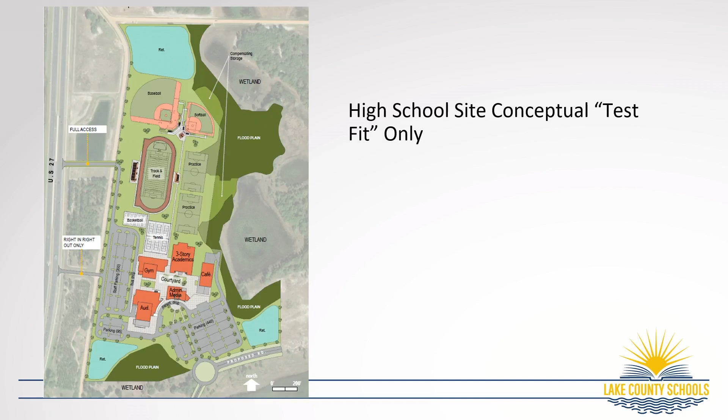As far as access, when we're this early in the development process, it's always a question. There is legal access from US 27, and North Bradshaw Road, although right now that's a dirt road. The seller is to construct the south access road, that loop running between Wellness Way and South Hancock. We would be, per the contract, responsible if the county or city requires a traffic control device at the entrance to the school, so if that's a roundabout or a signal, when we actually go through to build this school, we would be responsible for it.

Then the utility connections — the seller is to extend the utilities to the site. One thing we were concerned about is timing, say something happens and it takes a while to develop this whole area. There's a provision for what they call self-help, basically a pioneer agreement that the district could use to pioneer those utilities. I don't anticipate having to use that, but I think it's a good idea to have that ability in the contract if we have to. It would then be reimbursed by the other developers as they came in. The contract also anticipates a post-closing agreement to memorialize all of those details, and James and I would be working with the developer through that before closing.

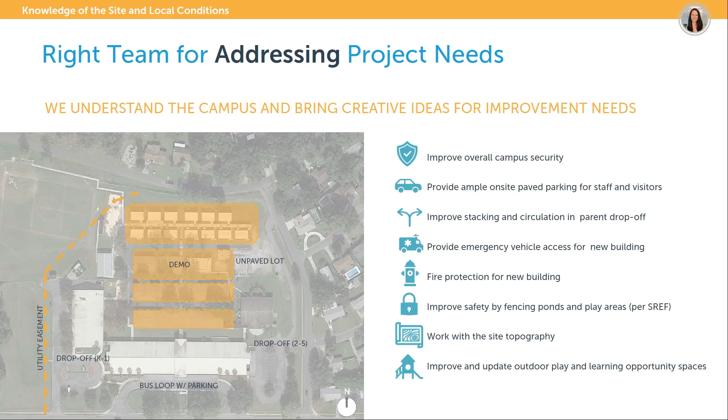The last one I'm going to talk about is fire protection. Your campus currently has buildings that don't have sprinkler systems, and you also don't have an on-site fire water loop with fire hydrants to service the buildings from the exterior. So that's something our team would want to look at, in addition to providing vehicular access for emergency vehicles.

Additionally, our team includes Matthew Flores, who is a former art teacher with OCPS at a Title I school. My sister is a principal at an OCPS K-8 school. Education is important to us not only because we're architects who want to design incredible 21st century learning environments, but because it's part of our DNA. It's part of who we are. It's part of what we give back to the community.

This is why, with this particular set of kids and these demographics, we need to give them all the opportunities to succeed. Research has shown that if you invest in their education and in facilities where they're able to learn and grow, they will want to come back to school, and they will cherish the moments they have there. So the demographics prove that, and with our help, we think we can make this school a hallmark for success in the future.

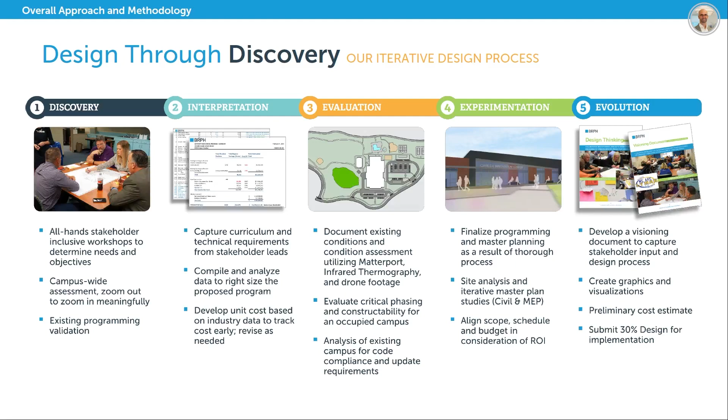Then we'll take that and work collaboratively within our own group, interpreting, evaluating, and experimenting with that data, and ultimately create a visioning document that synthesizes all of that stakeholder information along with our creative process into a compiled document for your review. But let's take a look at what that discovery process looks like.

Our initial phase will include design thinking sessions where we work with your stakeholders through the lens of 6 different education-specific design drivers: safety and security, technology, wellness and sustainability, flexibility and adaptability, teaching methods—such as what specifically you're trying to accomplish with the art program at this campus—and finally the human experience, where we focus on the individual, the group, and the community at large.

But we don't just take this evidence-based design approach to our projects. We weave something through all of this that is unique, creative, artistic, and we create a design story, a design narrative. We look for opportunities, for hidden gems in the project that we can pull out and create this beacon, as my colleague Francisco said, within the community.

And we see a great opportunity to build a story around flamingos. We've already been doing our research on flamingos, and they are unique and fascinating to watch. They're very social creatures. We want to create an opportunity, a new habitat for students similar to a habitat that flamingos live in. We took a deeper dive and identified that there are 6 different types of flamingos, including pink, white, red, and orange. They are identified by their voice, by their parents when they're young. And the parents, the mother and the father, both take a collaborative approach to building the nest for their egg.

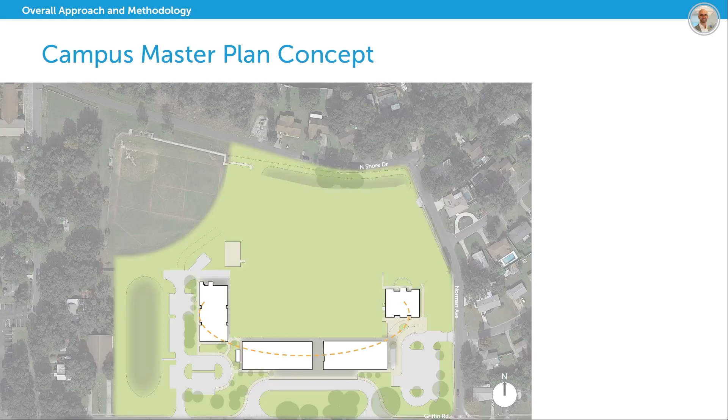So what happens when we demo the old buildings off of the campus? We see this new organization start to happen. We see a ring of buildings, and we see an opportunity to complete that ring and ultimately create a campus that is built around a campus quad.

This is one concept. We can develop several others, but this is an initial concept where we have buildings 1, 2, and 3 existing. Building 4 is a brand new 2-story classroom building. Number 5, you have the campus quad in the center. We've included additional parking to address the needs mentioned earlier, and an extended drop-off canopy.

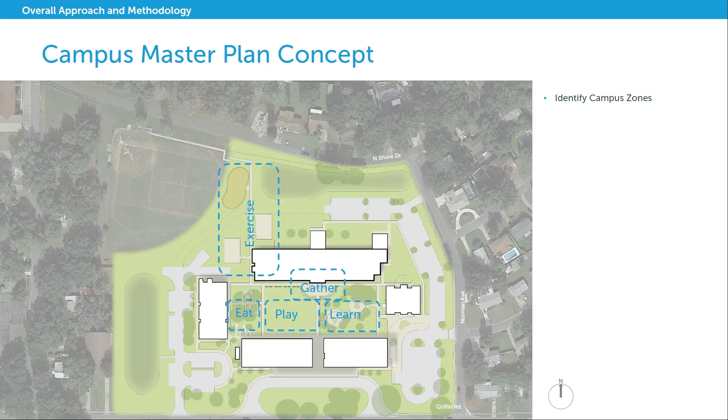I'm not going to read all of these, but you can see that basically this brand new campus goes around this center courtyard concept, and you can see the zones created through the organization of this new campus.

These are some of the highlighted opportunities we see, from shaded picnic to gardening, open field play, outdoor amphitheater so you can accommodate school-wide events, shaded learning pods, shaded entry and covered paths along the way.

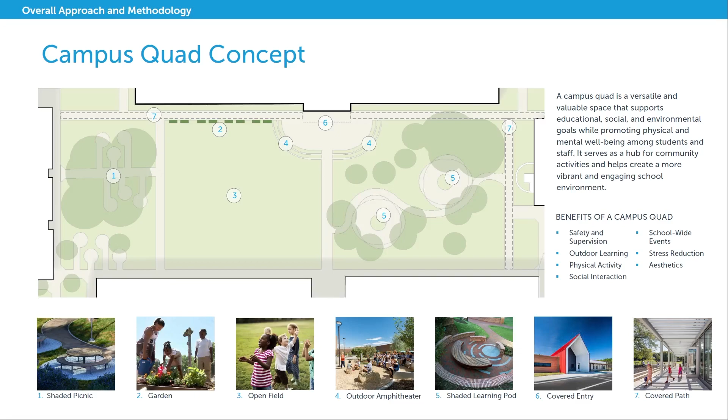We've basically replaced all of the existing program with 38 classrooms for now. We can identify and narrow down this scope later, but all of this is centralized around a center learning area that can be utilized for extended learning.

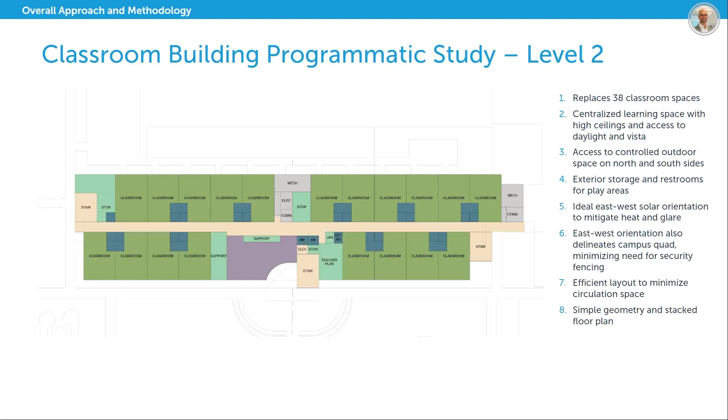And we have fenced-in areas on the north and south side for the students as well. The second floor is designed in an efficient manner so that we can stack program, and there are a lot of efficiencies we can gain through that type of organization.

We'll go through an iterative process where we play with form. We continue what we've already started in terms of the experience for the students.

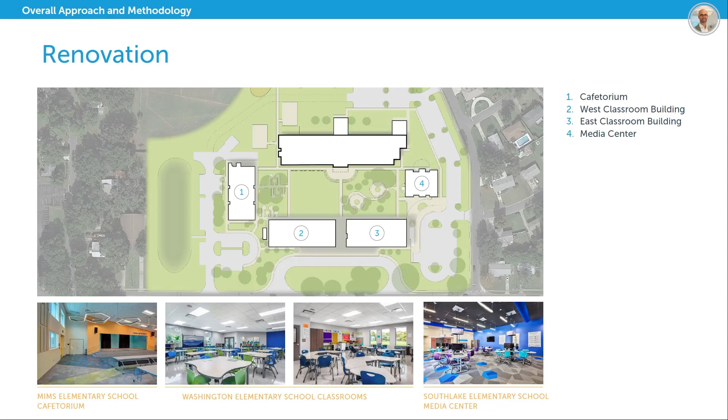And finally, we don't want to leave behind the existing buildings. We see opportunity to renovate the cafetorium, existing classroom and administration building, and of course the media center, which needs a good bit of attention. And with that said, I'll pass it on to Leah.

From an MEP perspective, we do want to do a new central energy plant for the new 2-story classroom building and also tie in the existing media center after the demolition. That's the last DX building, so we'll tie it in from an energy efficiency standpoint.

We would also provide chill water to valve boxes outside of the cafetorium and admin classroom. We understand the RFP had in there to do renovations for mechanical, but we also understand that might be a budgeting concern, so we'll at least size the CEP for future growth and be able to tie those buildings in the future. And as we work through the budget, if we can afford to do it, we will do it and tie those buildings in.

We also want to do LED lighting and technology upgrades campus-wide so that there's equity across the campus. We do have lead time problems still, so we will have to do an early equipment package from a scheduling standpoint. And for a little background on our knowledge of this campus, we did do the consulting report in 2021, and we've also developed the new design guidelines, so we're very familiar with the district standards.

So we're looking at a construction schedule. Here's our schedule - we're looking at a construction schedule of 18 months. But to back it up, if we start with the NTP in December and go through programming, schematic design, and so on, our goal would be at the end of design development, as Leah said, to do that optional procurement package for electrical and mechanical gear, so that by the time we finish construction documents in September, you would have had enough time to start procuring that equipment, so that in January you'll be kicking off construction and you'll be ahead of the game right there.

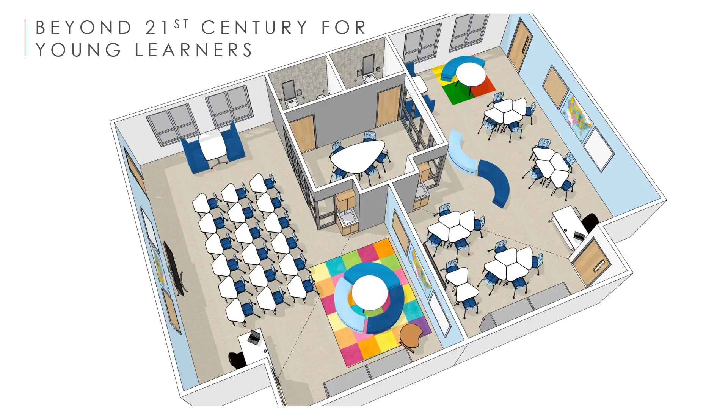Furniture - knowing the size, the little feet and footsteps that happen at an elementary level, particularly at the primary level, it's important to know distances between buildings and the furniture selections that go into the spaces we have. We want to talk throughout the design process about the adjacencies of classrooms, access for the restrooms, and some of those in-between spaces that may support these various teaching and learning styles.

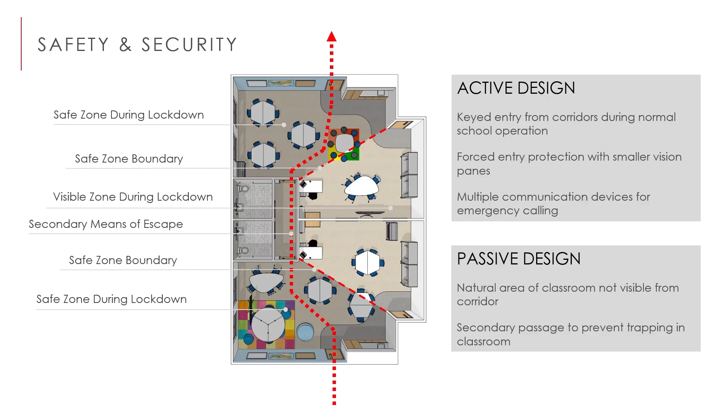Safety and security is top of mind for all of us. We need to approach it not only from the single point of entry on a campus, but the way students move in and out, and everyone in the school. We have a couple of examples here graphically showing the classrooms, the safe zones, passive observation areas - everything from the physical layout of space to access control and everything that supports the teachers and the students.

A lot of the way we work is in real time in 3 dimensions - designing on the fly, which helps facilitate conversations about spatial adjacencies. It's a dynamic design process where we use visualization and virtual reality to look at these - 2 different spaces that are virtually the same, but through material selection can have a huge impact, and furniture selection can have a huge impact as well.

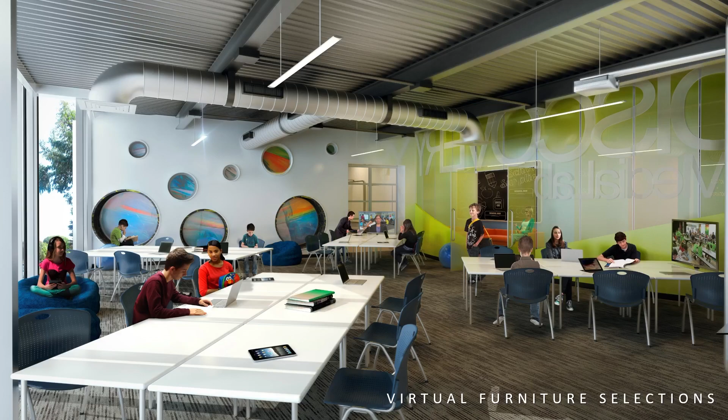So from day one, after we understand your needs thoroughly, we'd be able to design in 3D and share those, and really make decisions as a group. That's what we need to do, is pull out all the best ideas from the entire design process to support your vision for the modernization of Beverly Shores.

An example right here, this is the replacement of Gerald Adams Elementary down in Stock Island, just outside Key West. Some smart planning went into this. At every grade level, they have a pull-out or collaborative space. How we designed it was we put 3 walls on it, on the exterior wall, but if they needed to capture it as a classroom in the future, they could add a 4th wall versus bringing a portable on site.

But they love the spaces they use, and we went back a year and 2 years later and found out that they use these spaces effectively.

The history of Beverly Shores Elementary is important, and this is an amazing point in the history of the school. Thinking about the future, we want to document that where appropriate. It could be simple graphics in the reception area, or it could be a room dedicated to the history of the school that we can put on display.

Cost control and value design. We know the budget, $21.5 million. We know all the issues. We've been through this multiple times, obviously.

Focusing on those last 2 issues, working closely with the CM and cost estimator. We know costs are rising, and we know lead times on some critical pieces are important, and it's been taking a little longer to get some of those pieces. So working with the CM and our historic cost database of recently bid projects, we'll be able to keep the project on budget and on schedule.

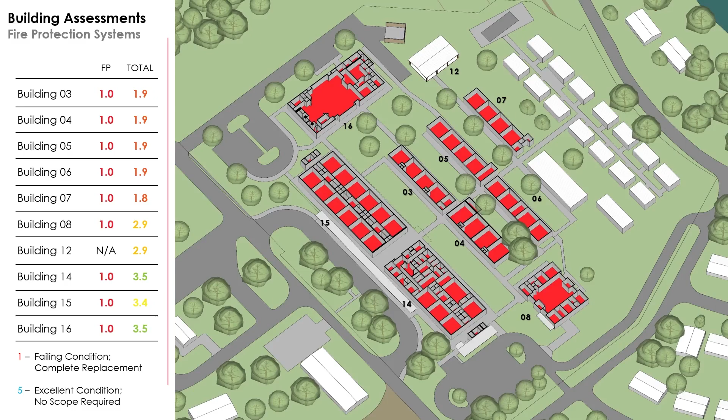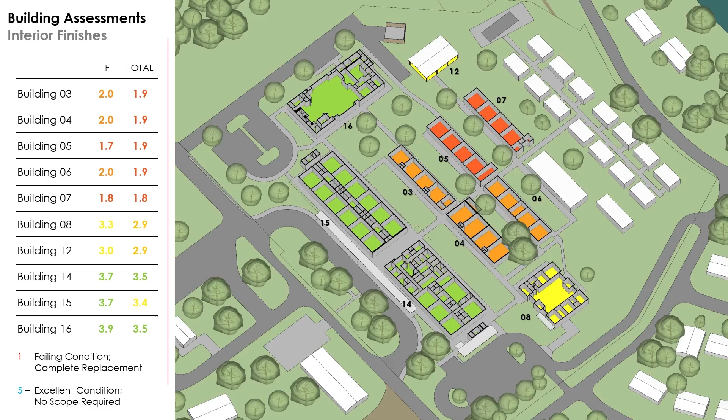Where we have some room for movement is in our interior finishes. Now, when we walk the school, it's in great shape for the age of the facility, but there might be things like, for example, VCT. That's a maintenance expense that the school principals take care of every year. By switching to LVT, which might have a little bit of a cost, that's something that we would eliminate. No need for waxing.

So we have a great handle on what the new construction costs, based on our database throughout the state. And so this exercise allows us to prioritize the priorities and the must-haves, and then also set a value to the wants.

Yeah, so Leesburg Library was actually my first project out of school as an intern with Harvard Jolly.

So we know the area quite well, and how does that translate to Beverly Shores? One of the things we took into account is how rapidly the education experience is changing there. I think Principal Christides has done a great job of improving the standards—I like her quote, our students deserve a quality education, and we're here to make that happen. I think that's something we can help with in the renovation of the campus.

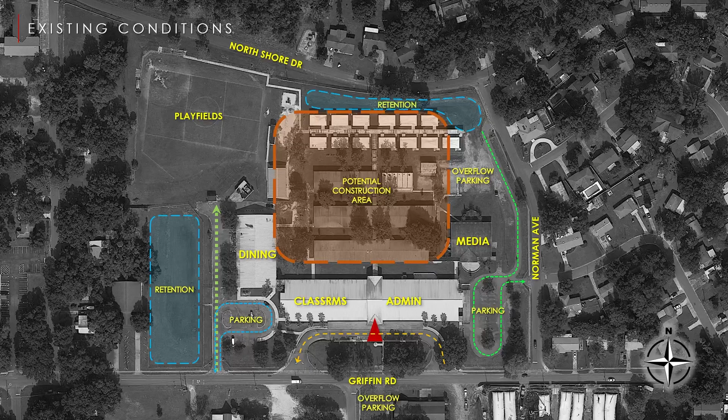We also observed the car lines and everything, and there's really a controlled chaos out there, which is pretty carefully put together. We were impressed with the detail on some of those things we saw around the site, and that's the type of detail we want to continue through as we potentially work with you on this project.

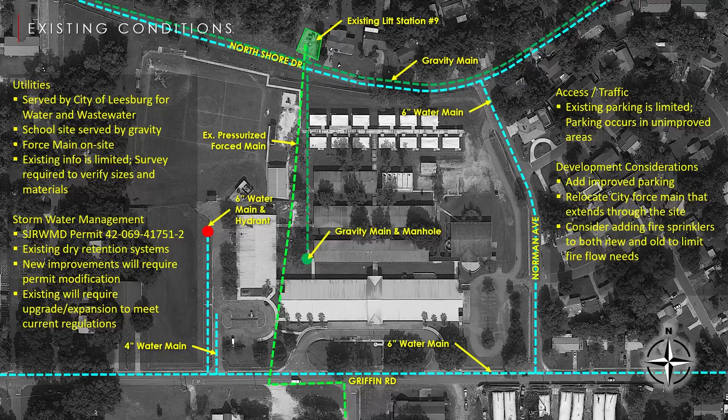One thing to note here from a site perspective: there's a force main running through the site, and to save some costs on the project, we are going to avoid that in our building footprint, so that money can be reallocated to educational spaces.

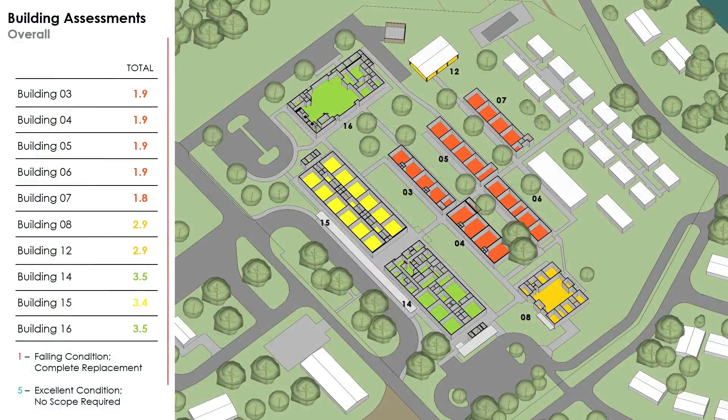So how does that translate to the revolution of the campus? Like I said, this is kind of what the existing condition of the campus is. And if we use the money right, we can start to transform some of the spaces.

So that money allocated to the media center could give us a look that modernizes it. We can reimagine the dining spaces. Right now the admin is in pretty good shape, but it doesn't have a traditional single point of entry in the sense that we currently do, so that's something we would need to address.

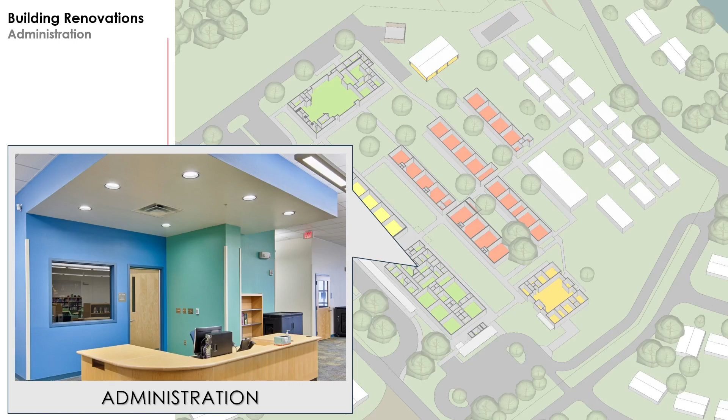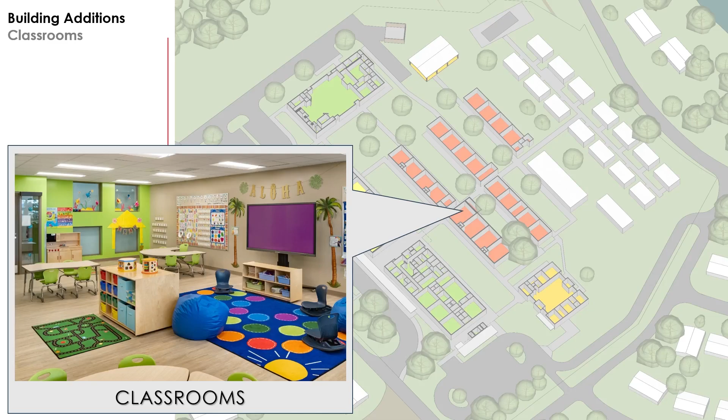And then finally, the bulk of this project is going to be the addition of classroom spaces, and this is where we can really start to put some effort into revolutionizing the campus.

So we're going to present two schemes for you. This first scheme is primarily looking at just adding classroom spaces—we're going to satisfy the need of providing a two-story classroom building. But this is going to help allocate the money to the other parts for the renovation piece. Again, in this scheme, we try to incorporate with what's working well.

So we have extended the parent drop-off to the north, and enhanced parts of the campus that we believe in, and also created a courtyard atmosphere. This is something we've seen as being very successful for these types of open campuses, where you have a secure perimeter, and the buildings form a perimeter, and then in between you can have lots of activity.

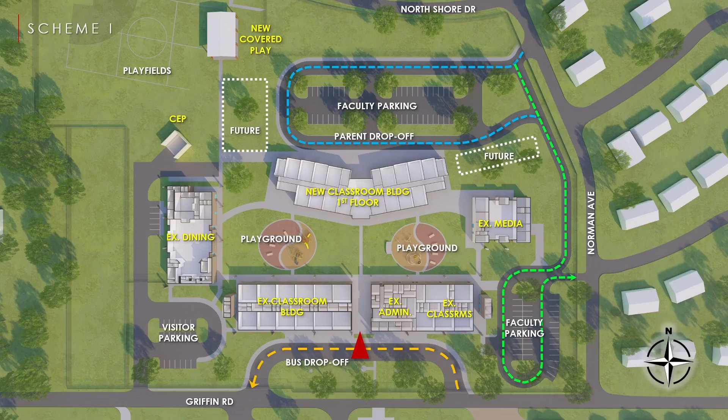And then with the new building, we can start to add collaboration spaces and activate some of the spaces that are not currently in the campus today. Again, we are proposing a two-story building, and we know the existing context is residential, but the way the building is positioned—in the middle of the site—the scale of the building is kind of hidden from the context of the surrounding community.

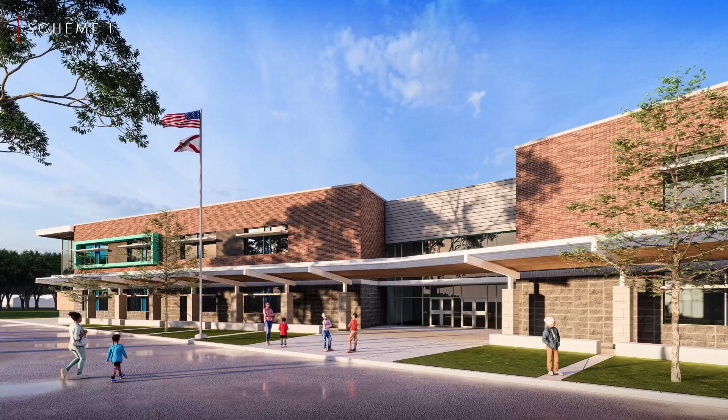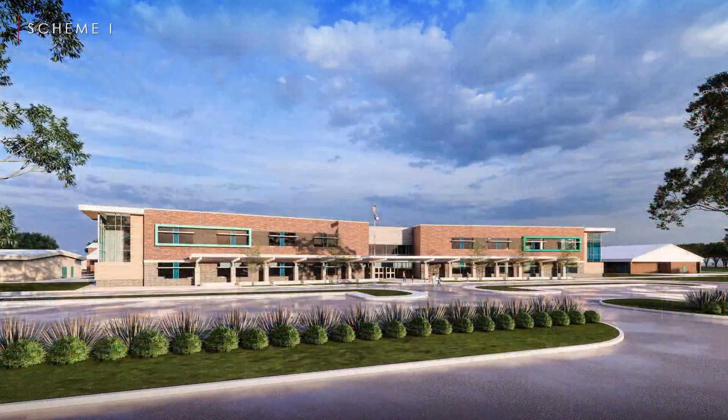So again, through the design process, we want to illustrate what this new two-story building could be. We bring this up live, and it really facilitates a conversation right there on the spot to look at scale, materiality, and what the impact of this new building is going to be on site. Here's another view, backed up a little bit, south-facing, north-facing in this view.

Beverly Shores has been around for 60 years, and we believe with this renovation, we can extend that timeline another 60 years. So we want to do something with this second scheme that really transforms the campus and the image of the campus.

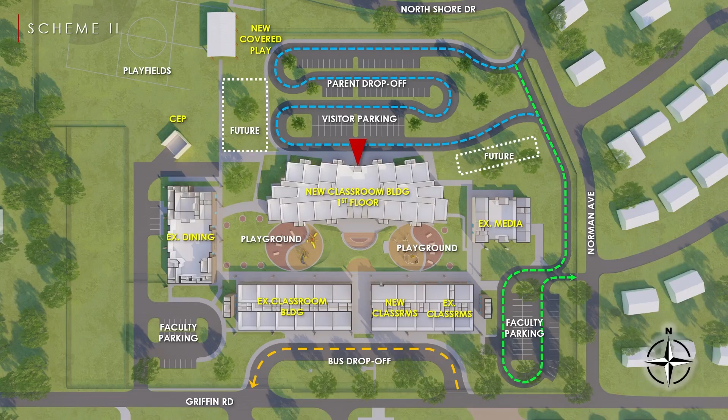The issues with not having a Sally port would now be eliminated. Now we have a single point of entry, creating a new front to the campus. We've extended the parent drop-off, made the queuing line longer, and addressed the faculty and visitor parking. There's no longer a need for overflow parking, and again we're maintaining that central courtyard.

We could really emphasize the single point of entry, which isn't current in the scheme as you see it. Although it's a two-story building, the scale is massaged by the adjacent existing buildings that remain, again creating that new front.

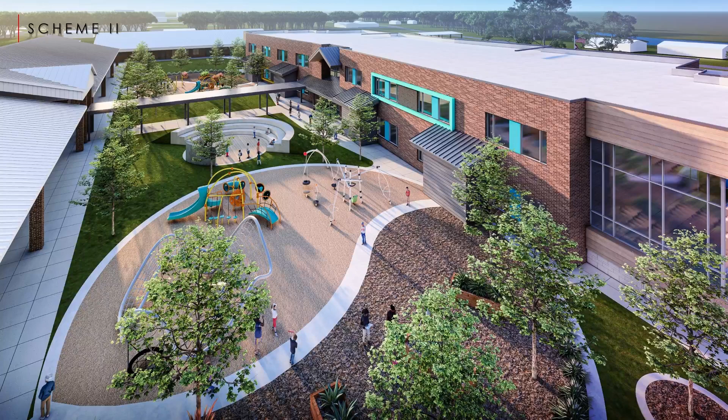The Principal mentioned the Performing Arts program - maybe there's a kind of space in there that can support that specifically. Really it's a blank canvas for that secured courtyard area that can accommodate a lot of the outdoor learning that many schools are embracing or want to embrace in the future.

These are some of the views, showing how we incorporate the trike track, or how the K2 playground is separated out while providing close access to the classroom building, which is typically pretty important. These are all variables, illustrated here in 3D.

I think a picture's worth 1,000 words. Typically these facilitate great conversations about how we manage your dollars and your budget based on the priorities of the project overall. So here's another view.

We just had some fun with this - architecturally it could end up in really any style, we want to blend in. One thing we know about this proposed two-story building is it's in the middle of the campus, not at the edge, so you won't overwhelm the residential neighborhood. We want to think about things like that.

In closing, we are here to support the vision of the school and the vision of the district, to see your vision and mission through. We don't currently work with you right now, and we're eager to prove ourselves. This is your team - the team that will be working with you day to day. We're here from start to finish, and we're committed. This is a priority project to our firm - Beverly Shores Elementary, the replacement. We love these types of transformational projects. Beverly Shores and the community is going to be transformed for the next 60 years.

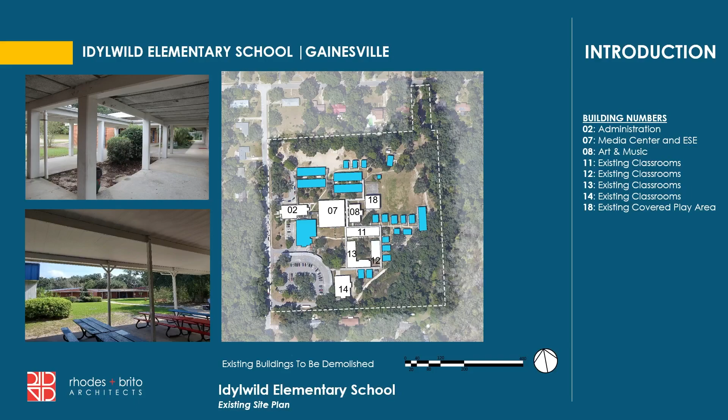Similar to the project at Beverly Shores, we had old buildings. A lot of the blue buildings were old buildings built in the 1960s, and also portables, a lot of this was because they needed permanent student spaces. The other thing was they had no organization in this campus. So what we did is we came about and created a plan. We built new classroom buildings, cafeteria, but also everything was built around a centralized courtyard.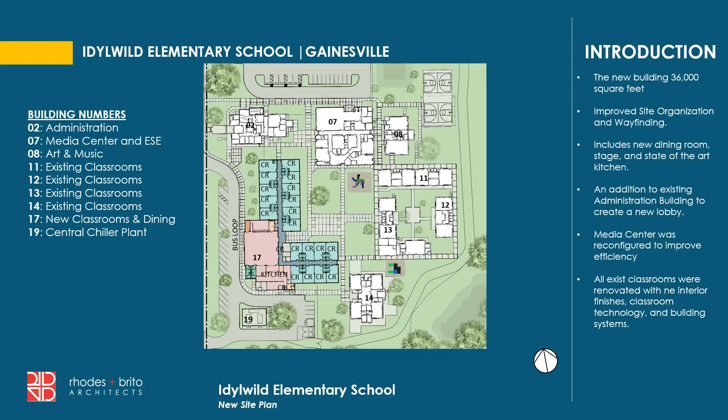And now wayfinding and people walking to this campus is totally transformed. And this is what we try to do in our goals, we try to take and improve a project. When they built buildings back then or added onto campuses, they just stuck it in the green field, they didn't think about circulation. So these are the things we're trying to bring back. And here's some imagery in front of our cafeteria and bus drop-off area, and also some of the classrooms that we did. So it was a very successful project.

So you're interviewing 5 firms today. I know all these firms, some of them are my friends, so I would love more than to beat some of my friends and win this project for you, for us.

But one of the most important skills an architect needs for this project's success is the skill to listen. This is why we received this compliment from one of our last clients, that we're excellent at listening to the needs of stakeholders and owners. It's one of the highest compliments we can get, because that's really what starts the ball rolling, and it's having good listening skills. So that's what we do best. Here's a list of some things that we carefully do, to pay careful attention to how we can make this project a success. However, the biggest thing is listening to you, the community, and the principal in terms of what they want. And so that's how we've been successful on that.

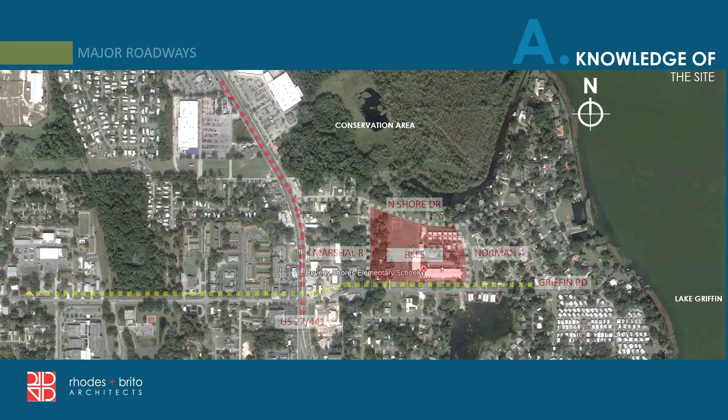So Byron, go ahead and talk about that. Thank you. Yes, well, you've asked us to talk about the knowledge of the site. And if you can see our school, it's located there, and you can see the major roadways that serve and get us to and from the school campus. One of the things looking at the existing site, we know it's about 15 acres. We have about 450 permanent student stations and 16 existing portables.

So one of the things that we've talked about is the parking is undersized. You're also utilizing now off-site parking. Also, the queuing has been an issue, and you have 2 queuing lines now. So those are the things that we're going to look into.

In terms of permitting and utilities, stormwater, St. Johns River Water Management is covering the stormwater. And we feel the infrastructure there is adequate, however it will be modified when we start constructing new buildings. So our purpose is to reuse these. Also, you have fire hydrants, fire mains, all of these things would be beneficial because we'll probably sprinkle our new building, and that would be very beneficial. In terms of permitting, there's courtesy reviews to the city, but mainly the school board is what controls a lot of our building permitting.

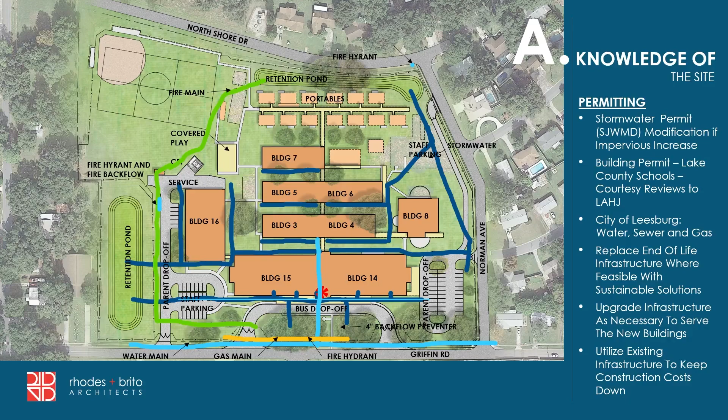All right, so we're going to study the demographics of Beverly Shores Elementary School. As you see here in the aerial, the school is located on this aerial in red. This is located in the city of Leesburg, northwest section. It's in School District 2. Right now, we've sort of summarized that it's about 660 current enrollment, maybe plus or minus. And there's 5 ESE classrooms, and we need to consider those classrooms as we do some planning.

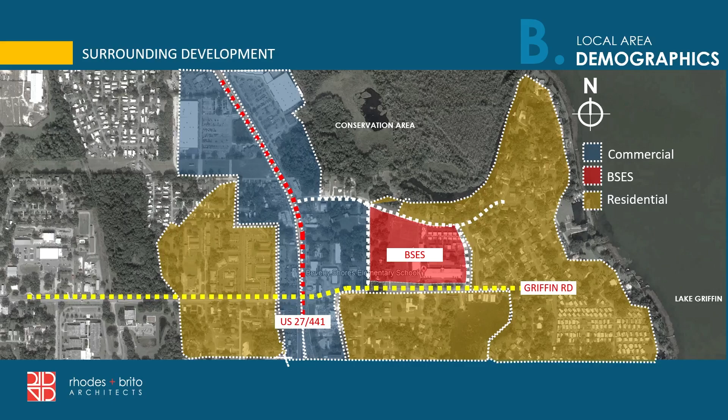We've looked at the surrounding development, and this is really critical for us to think about how this planning process will occur. Along US 27 and 441 is a commercial corridor, and then the surrounding areas are full of residential developments. We've even taken a step forward and looked at some of the neighborhoods there, and listed as many of them as we can. There's several 55-plus communities around. But this is what we call a neighborhood school, or a community school. And one of the things we're hoping, and it's part of your success, is that you have a lot of volunteerism and inclusion, especially with the 55-plus group.

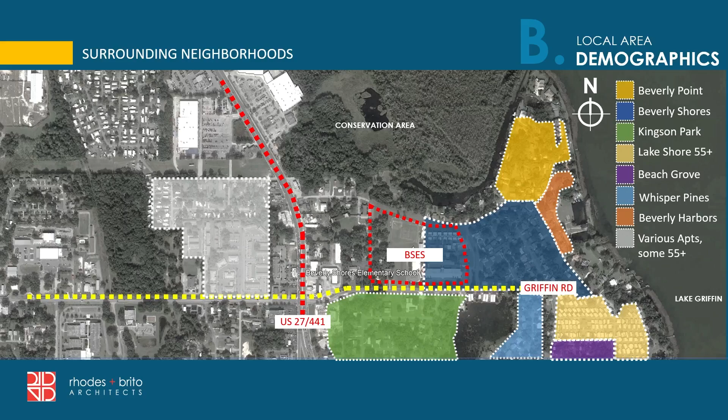Took a snapshot of the demographics of the community and school data. We've recently completed 2 schools with these same demographics. And as Byron said, there's nothing more pleasing when you finish a job and have the kids come in and see something new. They want to know that people care. And so we love doing these types of projects and the renovation, and we think that this new work can be a big improvement.

Congratulations on the B+, that's awesome. You guys, we saw the previous score, and this is reason to celebrate. We see schools as a center of community, and what that means is they're a community asset.

And so it's not just about student learning, it's a multi-generational asset that people can come and utilize—mentorships, apprenticeships, after-school support, continuing education, shared public access. When people know that this facility is a community asset, then they all get behind the development and caring for what it takes to make it successful.

Community engagement is what we have a passion about. And of course, we will work with the school district in terms of setting that up and how you want to proceed. But we love engaging with the community and getting their feedback, as well as the school and administration. So this is just an idea.

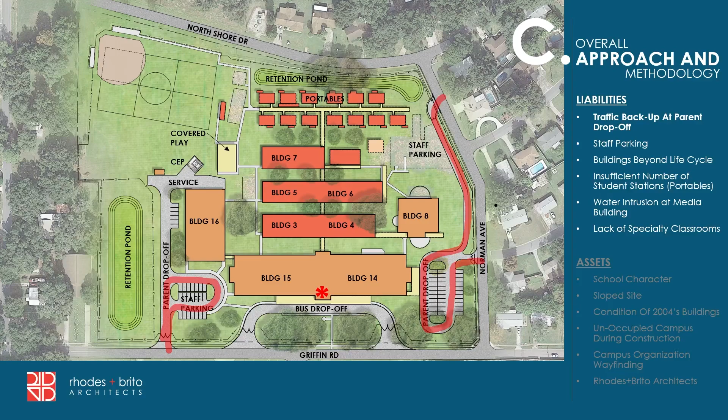Also, once we look at and remove these liabilities, we have a clear palette in which we can start painting our new vision. If you look at some of the assets we have, you have a sloped site—that should aid us in stormwater management—and you also have the 2004 buildings. These have great bones, so that could be a cost savings in how far we go into renovating these buildings. Maybe some of the stuff we could refurbish and maintain.

Finally, this is something we deal with all the time—we're saving a lot of money by having an unoccupied campus. There's no phasing, there's no portables you have to bring in, and you can probably get this construction done anywhere between 10 and 12 months. So reducing the construction schedule will help save you a lot of money.

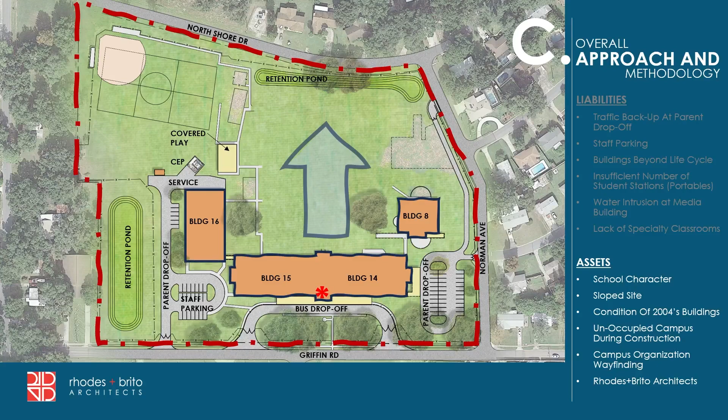Moving on and talking about design considerations—building placement, how do we place it, campus flow, integration into school programs, that's an important one. We're not going to just drop a building here and say these are the spaces. We're going to look at the whole campus as a whole and see how we can ensure and even improve the function of the building right now. Those are very important things. We also talked about campus security.

So looking closer into the site, here are some ideas we will look into. Obviously, there's a courtyard—that can be a secured courtyard. That courtyard could accommodate a lot of things, whether it's outdoor learning, a playground for tots and youth, outdoor dining, or educational opportunities. Also, we're looking at building a new classroom building of about 50,000 square feet, expanding our CEP and improving the queuing scenario to help traffic around the site. Also, look at the existing functions you have and how they're arranged on campus—we could work at rearranging a few spaces, and that's something we will look into.

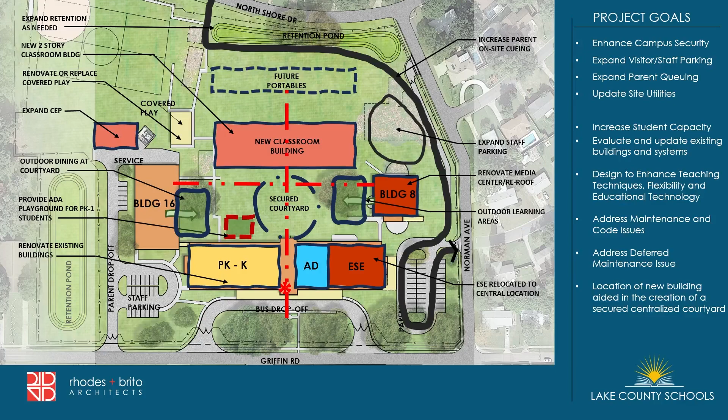So Angie, why don't you talk about some of our planning ideas? Thank you, Byron. So we've created two site concepts that really start to solve some of the liability issues that Byron mentioned earlier. Now, we took the liberty of doing this, but honestly, what's missing is your input. So once we get started on work, all this goes away, and we start with your vision. Now, this new building was placed really in the most optimal location, and that is what starts to create that secure courtyard.

As Byron mentioned earlier, there are opportunities for outdoor learning, for placing the school, the playground spaces there, and for outdoor dining. One thing we looked at is expanding that parent queuing, combining both parent queuing lines and extending it to 124 on-site or 94 car queuing.

That's going to help reduce any backup into the surrounding community. We've also added space for staff parking, expanded to 124 on-site parking spaces. Now here's a look at our proposed security fencing, created around the entire perimeter of the campus as it essentially is now, but we've also created a second level of fencing to protect the students during the school day.

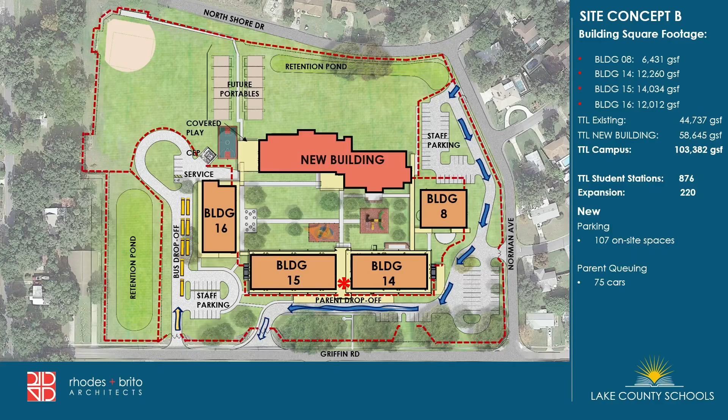Again, this is the site security. Now, we did take the liberty of taking that last building concept and creating a rendering for it, just so you can see what your building may look like, what the campus may look like at the end of construction.

So here's a view from between those two, building 14 and 15, looking towards the new building and that outdoor courtyard. Here's a look at the front, and here's another look at it. And then here's one of those outdoor learning spaces that we created.

Now, very quickly, I want to touch on creating learning communities using 21st century educational design. This layout is essentially a community of about 9 classrooms, where you could have an entire grade level. Our main focus is that collaboration area in blue, which allows everyone to use this space. We've used modular furniture to provide all sorts of modalities for teachers, and it also allows teachers to participate in co-teaching and co-planning for a grade level.

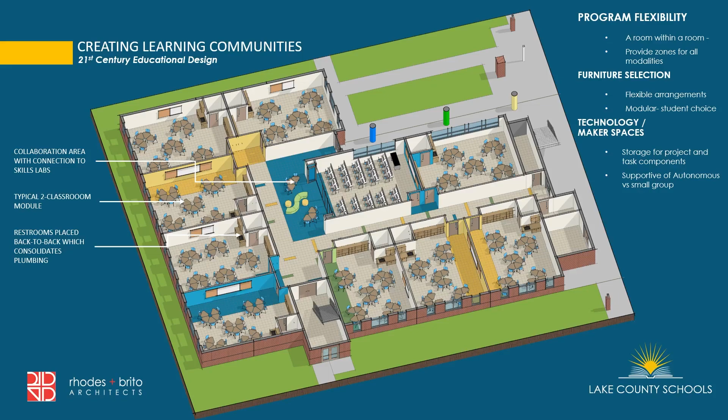Thank you. I'm going to talk quickly about our cost control and value engineering. As you know, you don't need to see this, you can just go to Publix, right? I mean, how much does stuff cost today? This is something everybody is dealing with today. But one of the things we like to do is talk about costs and how we work with them.

We have a cost estimator on board, and we work with that person throughout the whole design process and design phase. We don't wait till the end of the project or the end of the phase to realize, oh wow, we're $2 or $3 million over budget. We like to work as we proceed and progress with the design in that phase, and we will address budget.

Now, you also talked about value engineering, and these are some lessons we've learned recently. Tilt wall construction is one way to save money. Hard bid situations—I don't know if you're going to hard bid or have a CM—but those types of delivery and construction could save you a lot of money.

The other thing we've looked at is maintaining versus replacing existing building systems. Do we need to replace every cabinet, every door, even the HVAC systems? These are things that Leah is going to work with us on. Those things may just need maintenance and refurbishment, which may save us a lot of money.

Also, prioritizing scope. We're not going to sit here all the time and say we can do this, we can give you the world. No, there's a limit, and we're going to have to prioritize what we need to do for this project if we're going to meet our budget.

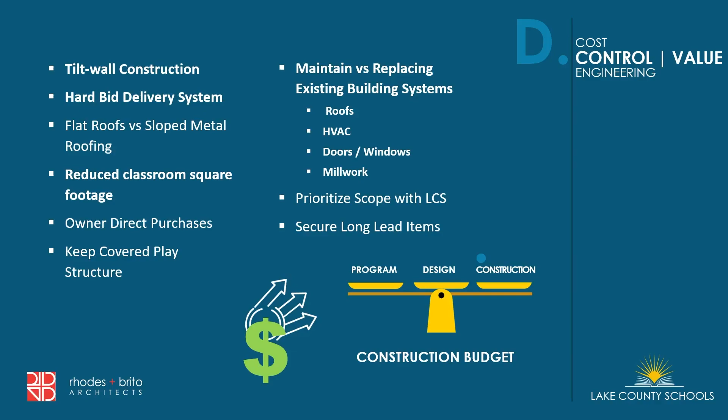Okay, and also secure long lead items. That's something that may or may not affect your budget, but it's going to affect your schedule. So those are the things that we've dealt with.

In terms of project schedule, we came up with a project schedule. This is something I think is very doable, and we could make this happen. One of the things for keeping our schedule is getting the civil involved after design development to start procuring site utility and stormwater permitting. Those things usually take us a long time.

At Rhodes Brito, on all of our jobs, sustainability is an important factor, along with working with our engineering. We can provide a lot of design tools, equipment, fixtures, and furnishings that would help save money and have a more efficient building. And now I'm going to leave it to Ruffin.

All right, thank you Byron. So these are 5 reasons why we think you should consider us for this job. Probably the biggest one is number 2: we're available, and we're ready to start now.

We purposely specialize and look for the right type of job. This job matches 2 previous elementary schools where we did renovations and additions. So you won't see us pursue a lot of RFQs because we're very selective, and this falls right within our experience. Along with these other facts, I'd just like to say give us consideration. We'd love to work on this project with you. With that, I'll open it up for any questions you have.

Thank you very much. All right, no questions? Well, I do have one. I saw, you didn't really talk about it, but I saw something about ESE cluster sites. What do you mean by that? Are you saying that you would put all the ESE classrooms in a similar area?

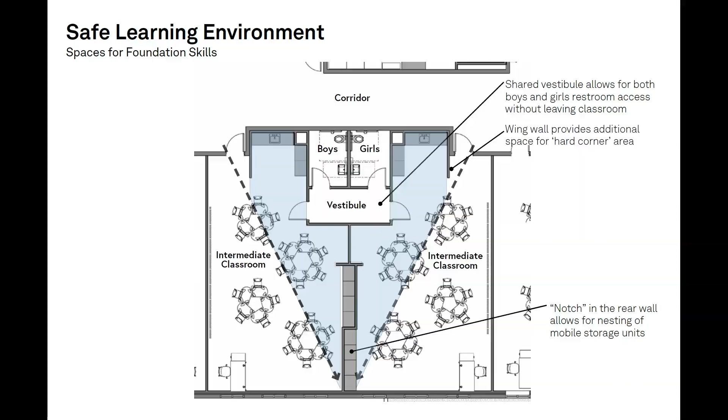The next item is cost control and value engineering. So we start with a breakdown of where the construction budget is as of today. We know the construction budget is $21.5 million. We think the biggest component of that will be the classroom addition, which based off the size of student stations, we think is approximately $9.7 million just for the new two-story classroom building.

The idea with that is we would address all of the other scope items, whether it's creating a new secure administration, like we talked about for secure check-in, expanding the admin area, also looking at the cafeteria, the kitchen, making it more efficient kitchen space, looking at PE spaces and other site improvements are all important things that we'll make sure we incorporate within that $11 million.

The important thing is knowing that we have that left over, we really need to be budget conscious and be as cost effective as we can to maximize as much as we can do for the extra scope.

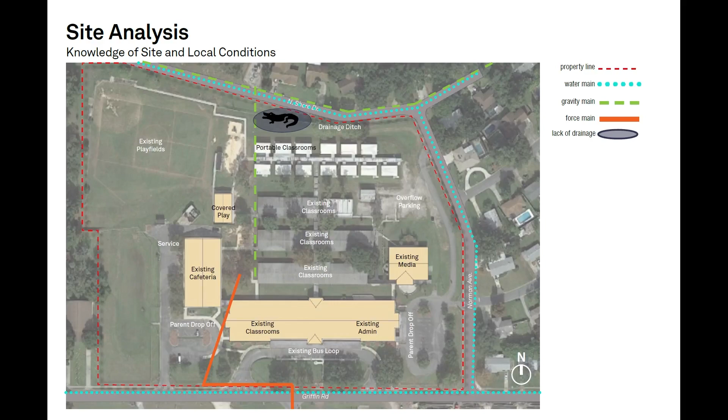The other things we took a look at: your lack of parking. We want to make sure we create a design that increases parking for all the staff you have on board. The other thing is the cafeteria and dining area—the restrooms are not designed for the students. There's only one toilet for each gender. We need to increase those.

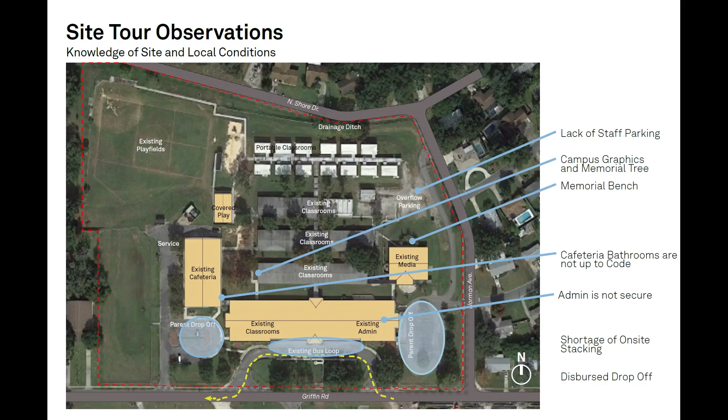We want to make sure that we don't destroy anything that was created by alumni or by the students, like the memorial tree or the bench. And then, as Patrick's mentioned a few times, making the admin secure and the site supervised.

We also know that community is going to be very important. It's an existing school with a history in this area, so how we engage the community will be an important part of the design. We have a lot of experience engaging stakeholders, whether it's with facilities and building systems, but also engaging the actual neighborhood and area as well.

Now we're going to talk about the exciting part: the overall approach and methodology here at Beverly Shores. Like Michelle said at the beginning, the whole objective is to really elevate this to a model school. So we're going to talk about some of the ideas for how we'll do that.

Before we get into the design, I want to touch on our process a little bit. One of the first and most critical steps is establishing the vision—sitting down with you all to figure out the goals and objectives, what this school wants to be, and where it's going. Engaging the community is important, and the next three steps are more technical aspects about incorporating infrastructure and doing due diligence to ensure a cost-effective and successful design. But the part I want to focus on is that first step, establishing the vision. Our approach is to cultivate a sense of pride for the students, the staff, and the community. We'll talk about how we're going to do that now.

This is the existing site aerial that you can see. Everything in gold or yellow is going to remain, obviously. Everything else is being replaced.

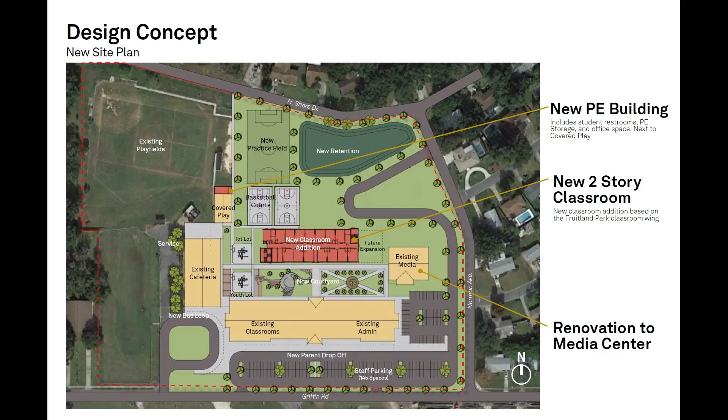We're going to propose a new two-story classroom addition just north of the existing one. We're also doing a renovation to the media center and proposing a new small PE addition to have some offices and bathrooms in that area. We're also going to upgrade the storm retention by adding and expanding the pond to the north. And then we're going to rework the traffic flow and add additional parking to accommodate all the challenges for that.

Safety and security is incredibly important, so the big idea here is to create a safe and secure courtyard design. As opposed to having everything scattered and dispersed, you have one central courtyard area. You've got building one in front, two buildings on each side, and one building behind. It's a very secure design, with fencing at all the ponds, and supervision for the PE and play fields. Now you have one office where they can see all of the play fields, whether it's covered play or outdoor areas - that's really important.

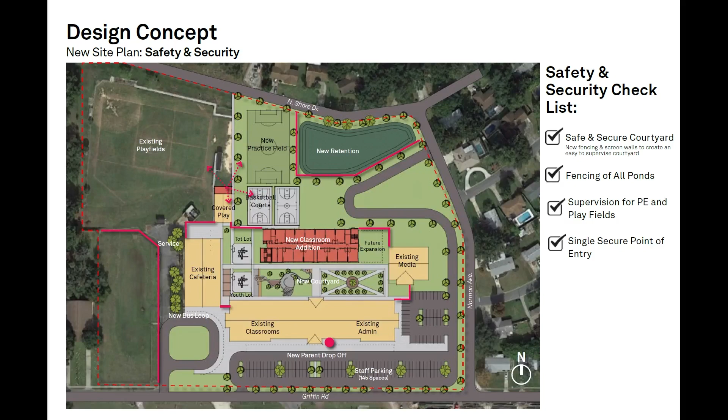And like Joe mentioned, we're going to have a single secure point of entry for the security as well. Separate the gator from the student. Normally we separate the contractor from the students. We know the children won't be there during construction, so we're switching that to separating the gator.

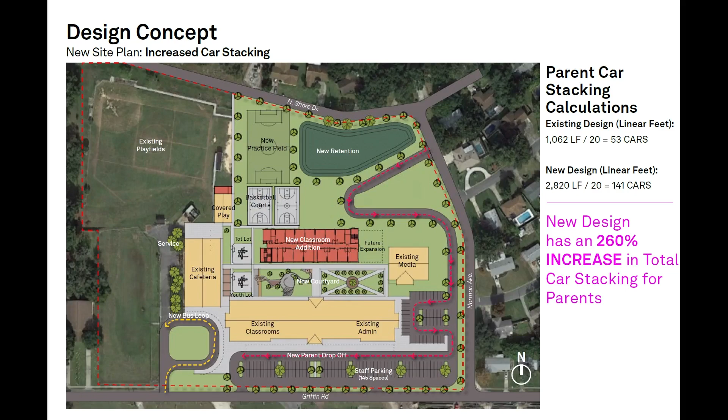We know that stacking is an issue on site with traffic flow, so what we're proposing is to flip it - instead of having the bus drop off right at the front of the school where the administration is, we're going to propose putting that on the left-hand side on the west. So you have one bus drop off on the left-hand side, still maintain where the cars are coming in off of Norman Avenue, but now we're going to drastically expand all of the stacking on site and expand the parking, so you have 145 staff parking spaces. The big takeaway is a 260% increase in total car stacking all on site. That's one of the things we knew was very important for this project.

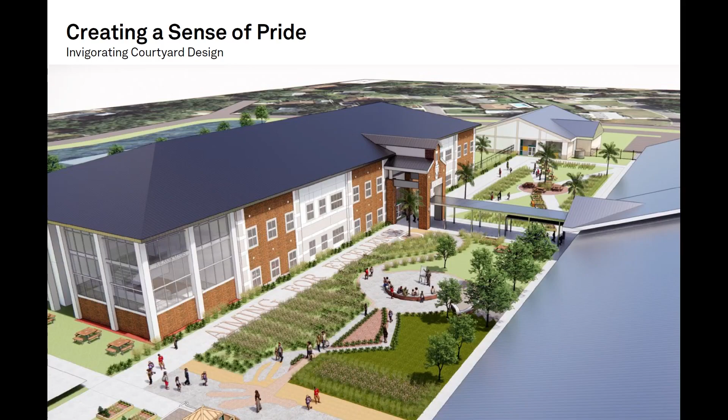Earlier I mentioned the idea of creating cost-effective ways of adding value to the project. So just like we've done with other projects, we look at doing an addition with a canopy along the front of the school to really give it a sense of pride, a sense of arrival, in a very cost-effective way - by giving it some signage, banners, and graphics right at the front of the school as well.

So hopefully what you've seen here today is a genuine level of excitement from all of us over... sorry, I'm so excited.

Hopefully you've seen a genuine level of excitement from all of us over the scope of this project. I have to tell you that these types of campus transformation projects are really important to us because you have an invested community already, and we have the chance to work with you all to really elevate the experience for everybody. It is one of our favorite types of projects to do. So we are thrilled to be able to talk with you today about this opportunity. And with that, happy to answer any questions you might have.

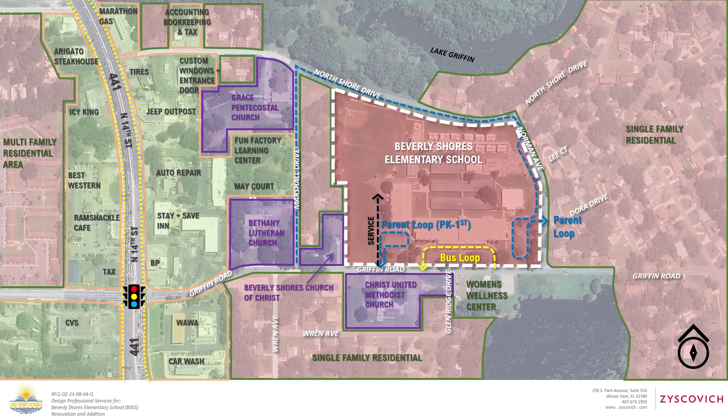The campus itself, we understand the 1960 buildings are being removed. We have a slope from south to north, but the buildings that are remaining, building 8, 14, 15, and 16, are going to be addressed in terms of comprehensive renovation. The media center is a little undersized, we need about another 1,000 square feet - doesn't mean we're going to do all that, but that's what we found. We also found cafeterias about 3,000 square feet under what it should be for the capacity we're trying to achieve, but we'll be working on those.

Here you can see the parent drop, the visitor drop, the visitor area, and also the service drive. So the front of the school in the center still remains like that, but we do have a lift, a force main crossing between the buildings, something we might try to avoid because that incurs a lot of cost to move around and change that position.

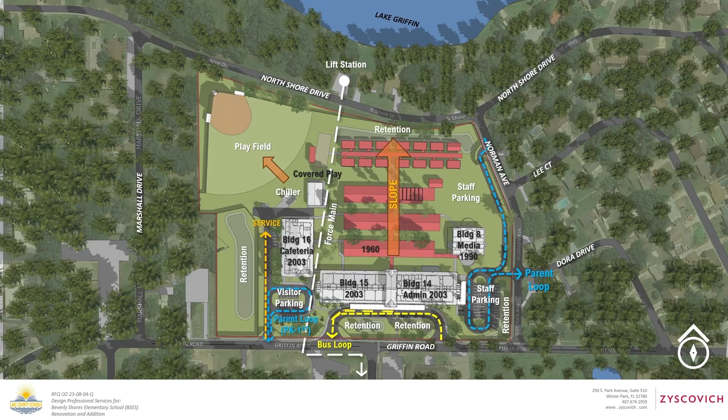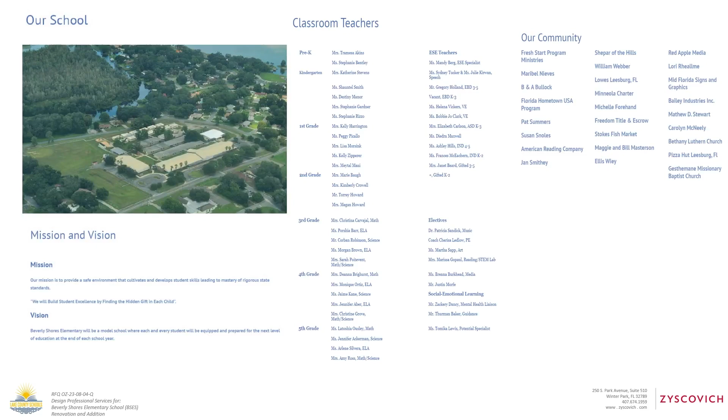Thanks, Renee. So all these things you could see, and you've probably heard quite a bit about them this morning. But the other thing is the local area demographics, and that's something particularly interesting. Of course, the teachers that are there, these are also things you could see. And then there's a lot of ESE kids in the school, which is an important component because of the challenges, the learning issues that go along with that special population.

There's a lot of demographic information showing the school has been lagging. It's been a school that's been struggling, and for a lot of good reasons - economic reasons, social reasons, a number of issues that have created a little bit of friction for advancement. These are all important issues because they deal with curriculum, they deal with pedagogy, and they deal with how you design spaces. You design the verbs, not the nouns. Classrooms are nouns. You design the verbs, the activities which shape instruction. And that's what we're going to be talking about, creating those verbs.

So as I looked through them, the thing that was most troubling was what was not measured, but what was felt, which is what's in the community and what you see in the newspaper. You see a place that has a perpetually failing Leesburg School, and that's damaging for a child to have that stigma. The press with the grades and the focus on that creates this kind of intangible problem - but this project actually could be the catalyst to turn it all around, and that's what I'm going to suggest this morning.

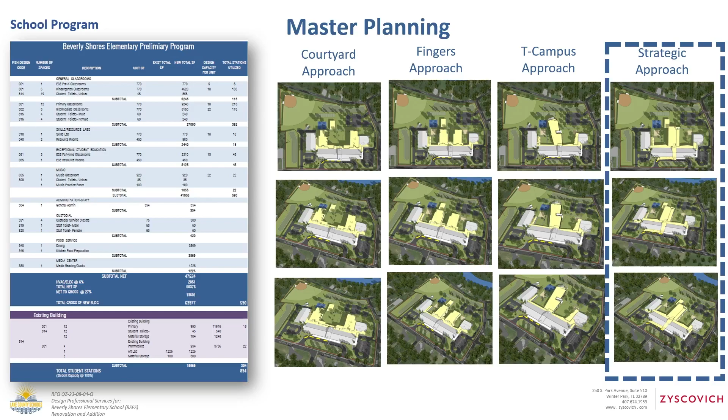Now, when we looked at the program that was resulting, something interesting happened. The program of the missing buildings, the ones you're going to replace, is actually the first and second floor of Keys Point Academy. It's the same number of classrooms, the same 21st century learning, the same resource room.

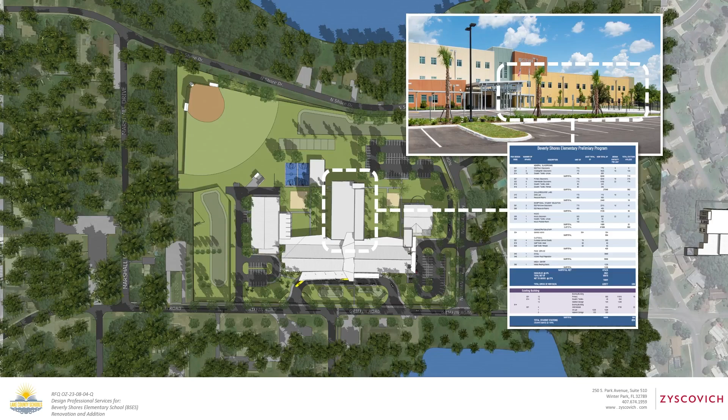So it gave us a running start on how to take something that already has your educational thinking, your curriculum in the 21st century, and then simply augment the things that are missing to address the special needs of this community.

So what we did is we took that piece and adapted it as a T-shaped building, plugging into what Renee was talking about—integrating the community traffic pattern, but enhancing the parking and enhancing the queue, and orienting the building to be optimum from a solar perspective.

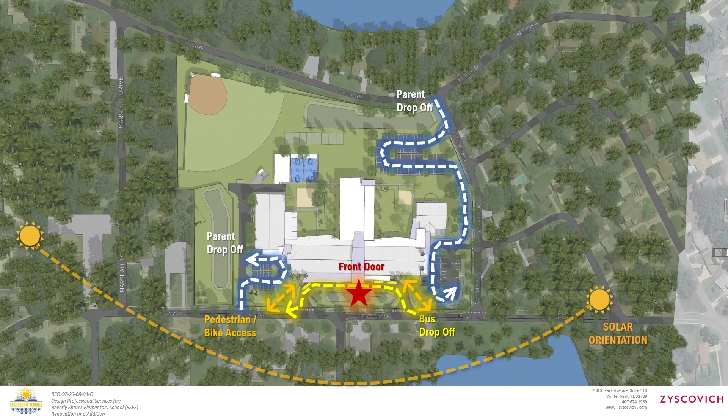But then we get into the building, and there's a couple of things that are prerequisite: safety and student security. Before I get there, this was something when we walked the site that I was amazed by—the big free room. You got that big space between the two buildings. All the walls are built, the roof's built, but it's underutilized space.

One of the things in the state recommendation is creating a positive school culture. That could be, and I'm going to share with you how we plan to do that, the place where comes the cultural hub, a place where the community comes, a place that creates basically an activity magnet for students to do a type of learning, the verbs I was just talking about. I'll share that with you in a moment.

The way we would do it is we would take the addition, we would bring the 28 classroom addition here, and there'd basically be these learning stairs that open up into this energy hub, this learning hub right in the core of the building, create a heart up there. So when students get in, they have a wow experience, something very special to lift the spirit as well as the grades.

So when we looked at that opportunity and then dealt with the other issue, which is safety and security, the school is porous. It basically has a number of doors that open to the outside. So what we do is hermetically seal that and provide internal circulation. We'd secure the entrance and have a welcome center, but all those doors that go to the outside would be sealed, and you would circulate from inside the school. Students are safe, easily supervised, not prone to any kind of incident from someone from the outside. So creating a safe environment is first and foremost.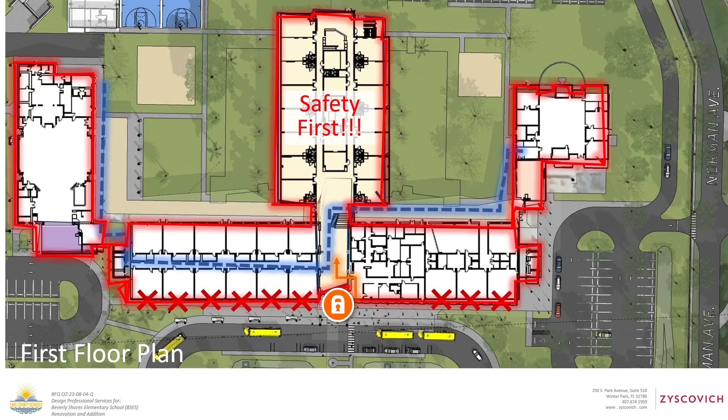Secondly, is creating the safe environment to learn in. And we call these nests. These are learning nests where we have four learning nests in the schools. Why are nests important? Because the students have all this coaching, all this work that needs to happen, so the one-on-one relationship with their coaches is essential, and that nest provides the safe environment for that to take place in. When we take that, incidentally, that's what we also have in the K-8s. It's working very, very well.

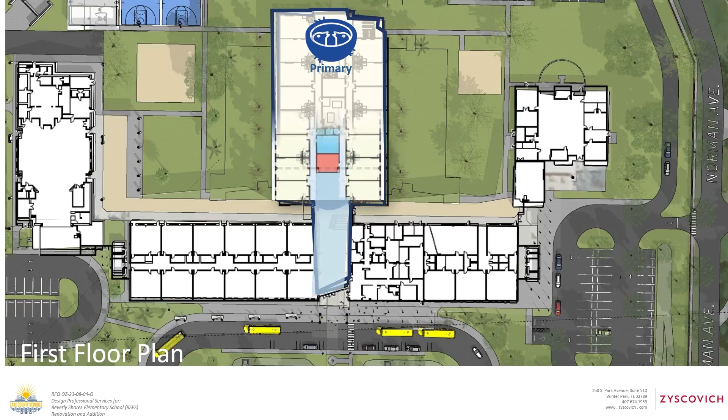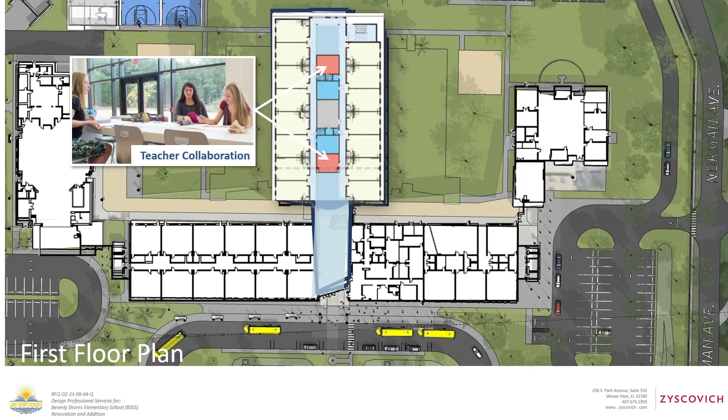And then we superimpose the plans on them. What the plan has are the classrooms that are there, but also teacher collaboration areas, another key step in creating best practices to lift the whole school. So providing the teacher-faculty areas, which are actually missing from your administration area square footage. That's how we're able to make that happen. And then you provide the breakout spaces for the nests as well as 21st century classrooms as you have in the K-8s that we're doing for you.

Most important is encouraging the parents to participate in their children's environment and learning. So you create a welcome center. We do the entrance and create the welcome center in that area so parents feel like they belong. They're part of the mission of improving the students' performance.

Now, that's a few of the things within the program, but what I'm suggesting now is basically some signature programs to really give the school a whole different trajectory. One is that center space, that center space, we're proposing, can be a wonderment center. A wonderment center that will have learning taking place, not simply an idle space. So it's an active beehive of activity within the supervision of the administration area.

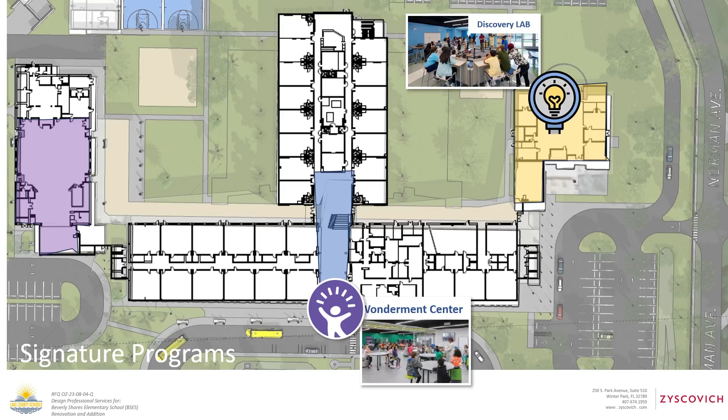The Discovery Lab, the Media Center we position as a Discovery Lab, and then the cafeteria, really more from a wellness perspective, not just eating, but also healthy behaviors and recreation.

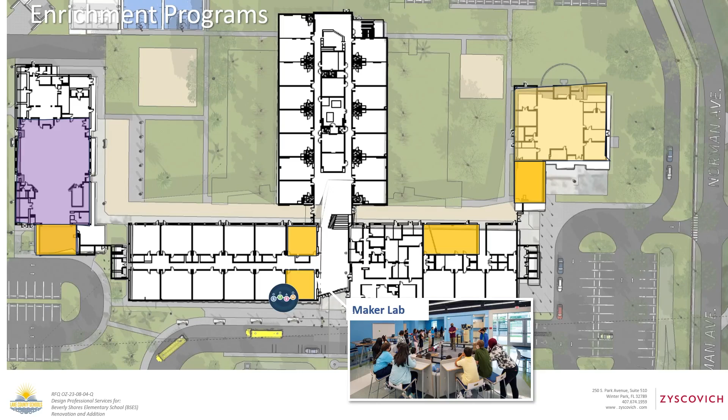There's also some enrichment programs that we think are already there. For example, these two classrooms here, they could open up into this area with some sliding doors like we have in the K-8 Keys Point Academy, and that will then provide the activity here for a maker lab, as well as a Da Vinci lab, which is basically your science lab. Your skills lab could be repositioned in that area, and thereby you create excitement and learning going on right in the heart of the school.

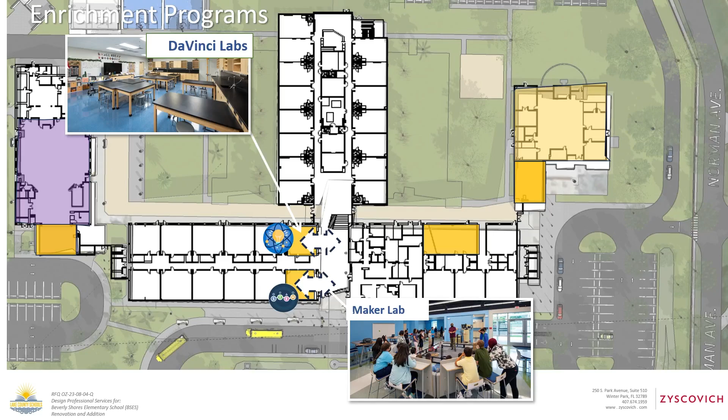It could open both inside and outside of that Wonderment Center. The Arts Center, we would reposition it, but also take advantage of outdoor learning now that that's become the primary circulation. And the missing skills lab in the Media Center, which is undersized, we're proposing to make a simulation lab to enhance the student experience beyond the neighborhood. These labs are basically simple technology we could introduce the students to a lot of different experiences.

And then finally, the school has a great arts program. We would put the new music lab behind the current stage, open the back of the stage so they could feed into the music program, and you've got a black box.

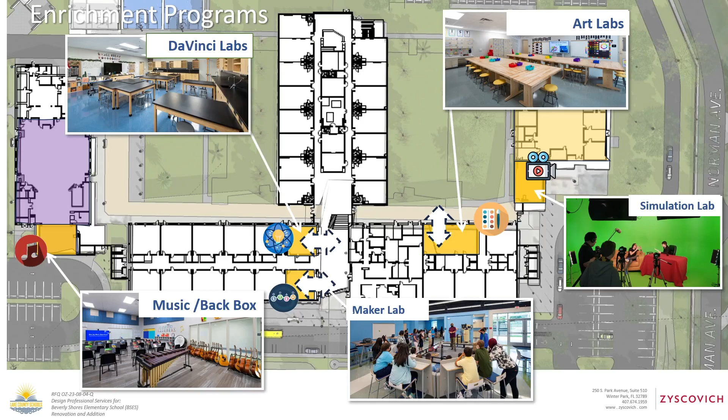So now you have an area where you could have performances as well as music. We're looking at how to transform the school that way, the second floor would work very much like the first, the same type of enhancements.

And then when we look at the school, it feels different. Students come here and it's been branded. Why is it branded? Because you want students to come - you have a demand function. When we opened Keys Point, that was the first environmental STEM school, and that created demand for it.

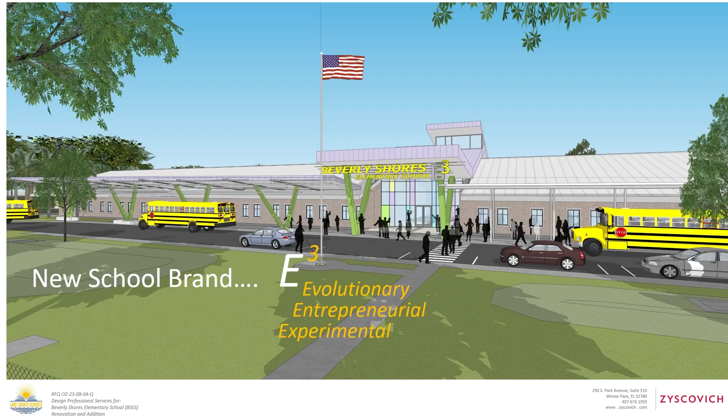And that's what we're proposing here. This could be an E3: evolutionary, entrepreneurial, and experimental. Why? Because it's about growth thinking - the students can become what they want. And the new facade provides that. The spaces on the outdoor for wellness...

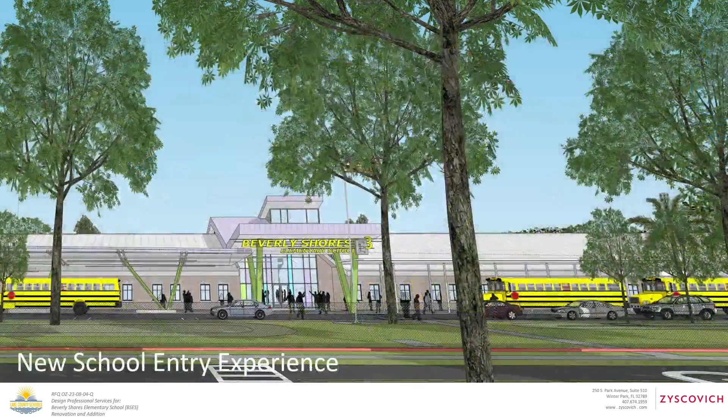And that gives you kind of a flavor, so they sense that it's a different time. It's Beverly Shores 2.0.

And then how do we make it happen? Well, we all know we're working in extremely escalated times, but the key is programming at the front end. That's where you have the maximum value, where you can make the biggest difference by right-sizing the building. That's where we work with you and your staff to right-size it, adjust based on pricing.

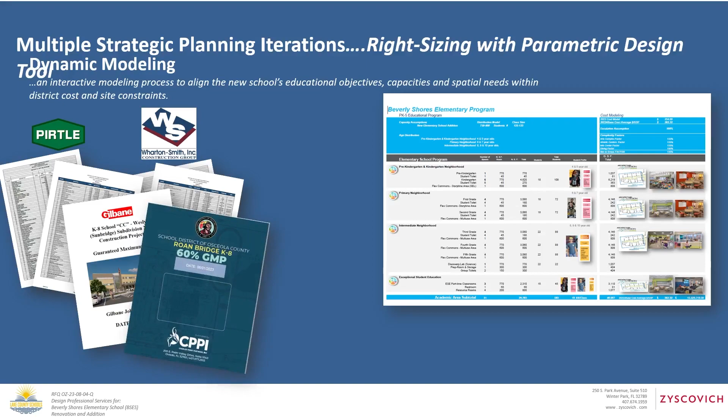We're building 6 K-8s as we speak, so we have a lot of great data on what things are costing, and we combine that with the curriculum objectives and capacities, and then we right-size the building that way. And that means you may find that the classrooms would be a little different, so you could have those little learning labs in the center. So we work with you on that.

Here's an example: the same K-8 in 2 different communities, one in OCPS, one in Osceola - 112 square feet per student station versus 95 square feet, same curriculum, same building. But it's basically a matter of efficiency through right-sizing, and there's also a $6 million difference.

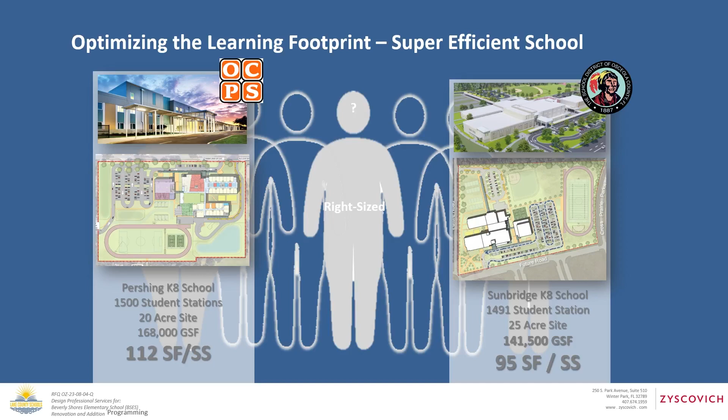We also use very commercially available systems. This is why we're experiencing very cost-competitive schools. We know that we have to break packages out and beat the escalation, so we are doing that for you to fight the cost.

And then during construction, it doesn't stop there. You have to be able to respond quickly to our partners in construction so they don't experience delays in costs. So we have the tools to achieve that with our technology. And then finally, once we get it built, like we did at Keys Point, we go back into the building and do the best lessons learned and put that in the next generation of schools that we do for you.

So this is the process that we do to ensure that not only do we design it right, but it also performs right.

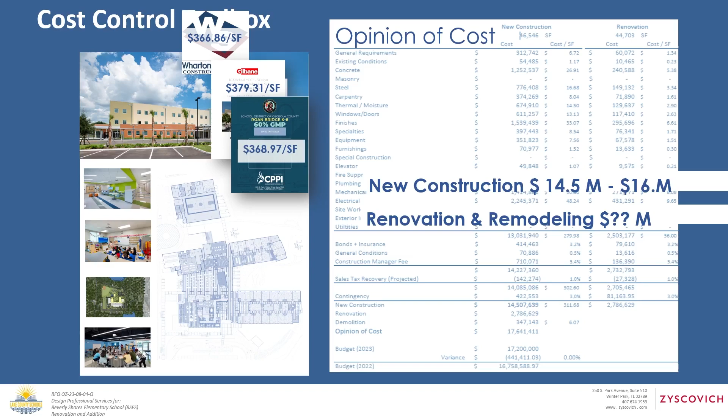We could do the time, and that's basically it. I have the capacity to do the project.

Thank you. Yeah, did I understand that you're taking the core of Lake Point Academy, and that's where the new 2-story is? It's the 2-story piece right next to the core. Okay, yeah. So there's some economy of scale, you've already got it designed.

Can we hold the microphone, please? That's exactly right, so there's economy of scale from your side. Yes, there's an expansion joint there that basically allows - we call it a zipper - allows that to be a module. That's why that building could expand, and along that zipper, you just take that two-story piece and that becomes your addition.